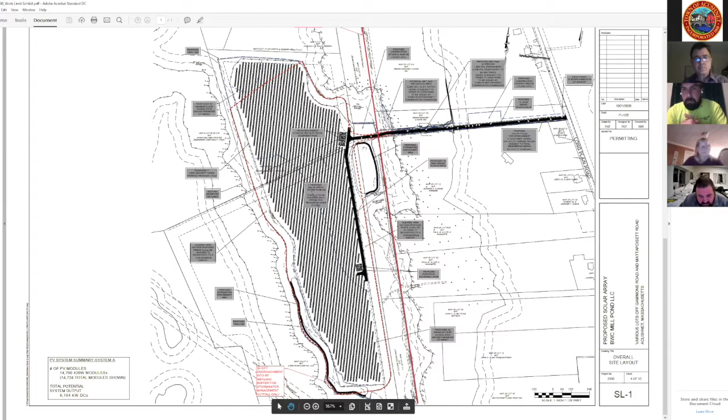This plan here is showing the red dashed line was the limits of work that were approved under the previous order of conditions for the project site last year. And then this bluish line that's following the tree line is the expansion of the limits of work that is required for the solar array. As you can see, for the most part, we're following the same line along the easterly and westerly side of the array, with the exception of the stormwater management facility here. And as I said, there's a small encroachment into the 50-foot wetland buffer here.

Access to the site is through an existing gravel road that comes in through the town of Mattapoisett. We will be filing a notice of intent with the town of Mattapoisett's Conservation Commission for improvements to this road, as it does go through an existing wetland system. It's an old farm road that was used to access this property. But all the work associated with the improvements to that road is in the town of Mattapoisett and would be covered under their notice of intent.

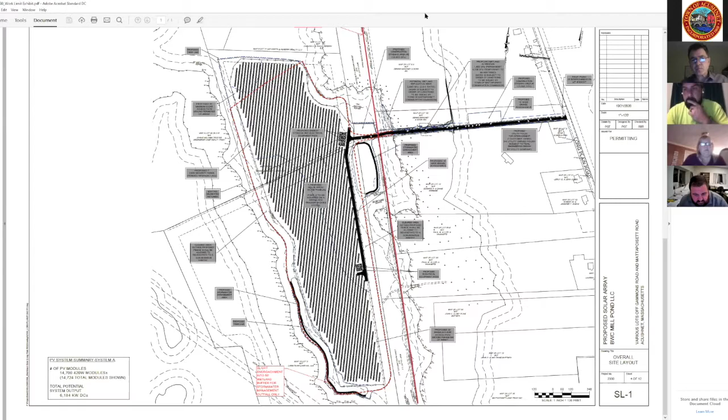Stormwater management is designed in accordance with the DEP standards. We've tried to follow all the DEP guidance documents with regards to siting the solar facilities in the buffer zone areas to the project. That basically summarizes the project. I'd be happy to take any questions. I am aware we don't have a DEP file number yet, but hopefully we can discuss the commission's comments and questions. Okay. Thank you, Mr. Riccio. Agent Kelly, questions, comments from you? How does the stormwater work? Can you explain it a little bit?

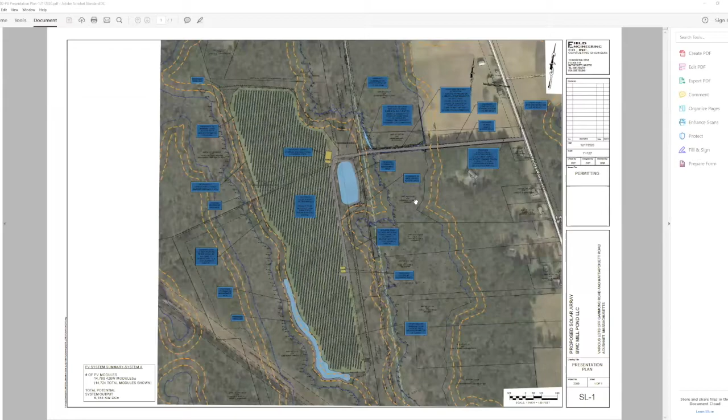Okay. Yes, I'm going to go back to the color plan here. Basically, what we have is the solar array itself. We're not changing any of the grades on the subject parcel. So there's a ridge line that runs through the center of the project. The topo splits, the runoff goes either to the east or to the west to the surrounding wetlands. The detention areas that have been designed are to reduce the rates of runoff to these wetlands, which comes from the clearing of the trees and the planting of what will end up being a meadow underneath the solar array.

The gravel road itself has a crushed stone edge drain infiltration trench that'll intercept the water that flows across the drive from the array. And that also has a piping component that will discharge into this detention area here. The detention basin has outlet control structures or outlet control culverts that will control the rates of runoff leaving the site.

During construction, we obviously have the perimeter stormwater controls, silt fence and straw wattles around the project. And given the size of the clearing areas, we're also proposing intermediate rows of straw wattles through the array itself to slow down any runoff during construction. It's pretty flat out there, if you recall when we were out there last year. So we don't anticipate a lot of high velocity runoff coming off of the array. But we did incorporate intermediate erosion controls within the array itself. Finally, upgradient of each stormwater basin, we do have another row of wattles and silt fence to protect those basins that would stay in place until the site stabilized with vegetation.

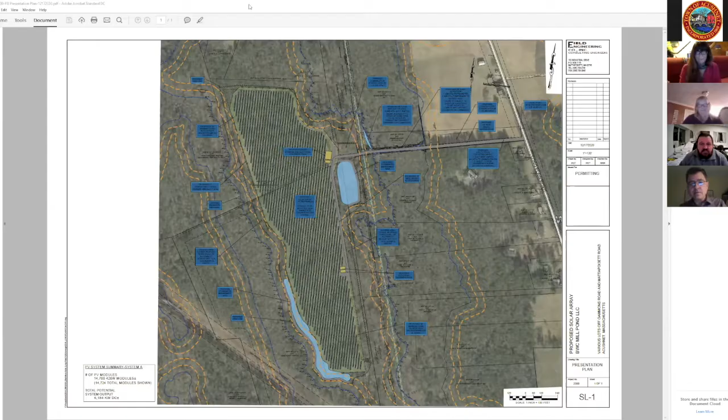So moved. Thank you, Everett. Do we have a second? I'll second that. Thank you, Ryan. Heidi, how do you vote? Heidi, is that a yes from you? Yeah, yes. Thank you. Everett, yes. Yes. And Ryan? Yes. So that's unanimous. Thank you all.

Appreciate that. Thank you, Mr. Riccio and Mr. Laracy. Thank you, Mr. Chair. Hope everyone has a happy holidays, Merry Christmas, and Happy New Year. You too. And we'll see you in January. See you in January. Super. Sounds good. Thank you very much.

Thanks. Okay, next item, we have a COC for GDC Development LLC for 1428 Main Street. A certificate of compliance was filed by GDC Development LLC for property located at 1428 Main Street, map 5, lot 6A. The applicant proposed to construct a single-family dwelling with associated grading and septic system. Somebody here to speak on behalf of this project?

Early, what do we know about this project? We were there on Saturday. It looks finished. Looks like it's been finished for a long time, actually. It looks good. Okay. Anybody else that was there like to comment? Yeah, it looks done to me. I see no reason not to award this COC. Okay, that's always good news. So, if you're not going to speak on this issue, I'll have you mute yourselves, please. Otherwise, if you do have a question or a comment for this project, please identify yourself and we'll accept your question or comment.

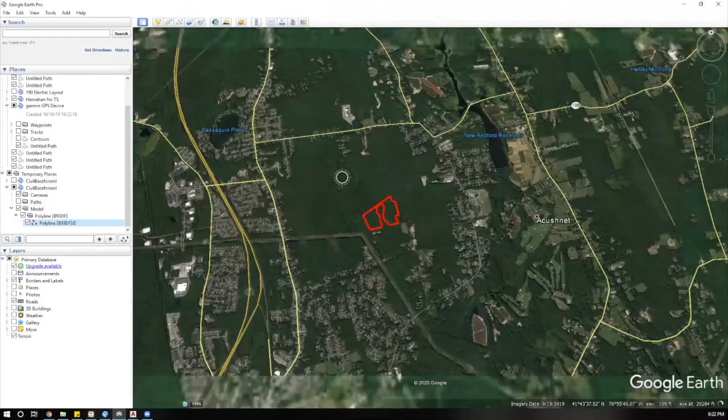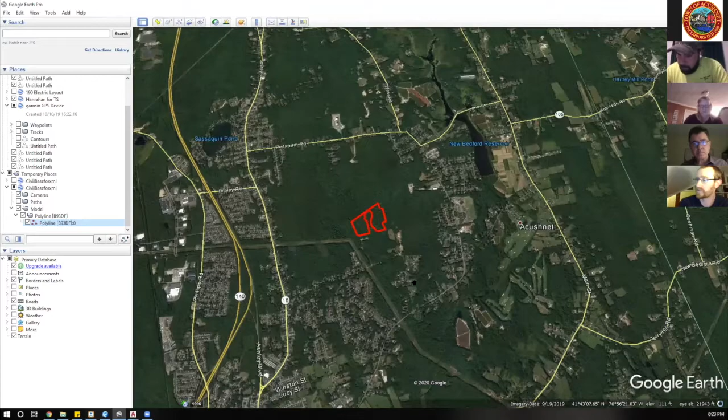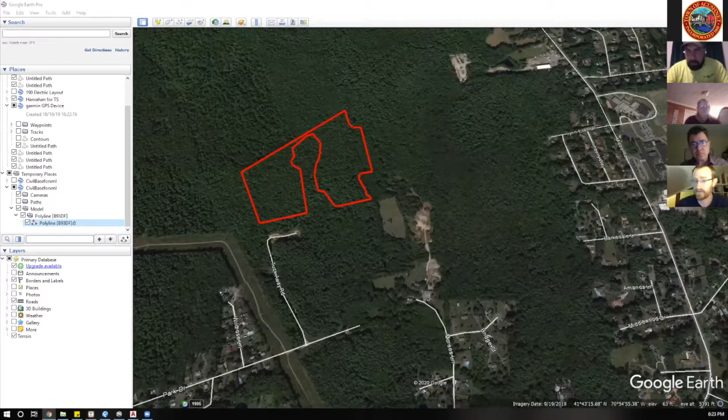All right, so this project is located on parcel 24, 24B and 24C, north of Morse's Lane. So you can see here on Google Earth, the project is located in this wooded area east of Route 140. Morse's Lane runs here. And this red line that you'll see is the project fence location. Let me just switch over to a view showing the project.

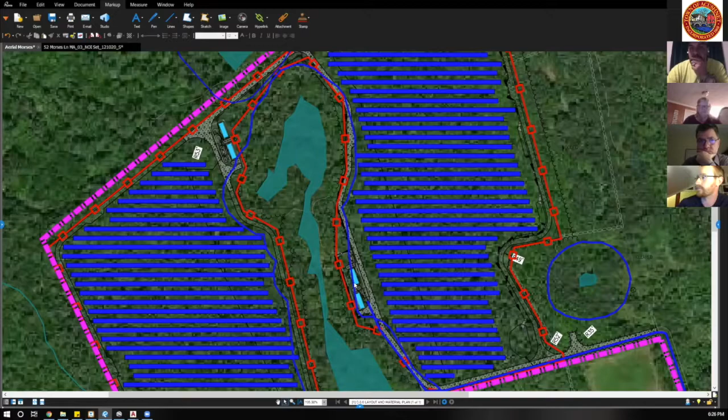The layout for this project, you may remember there's another Borrego project, the Mendel Road project that we have had. We used a very similar layout structure where we did not encroach anywhere on the site within the 50-foot buffer of any resource, wetland or vernal pool. So all work would be outside of that kind of 50 to 100-foot buffer.

It's split between shade management areas, which would just be tree cutting, leaving the stump, minimizing earth disturbance there. And then inside the fence, which would require the removal of stumps. Let's see here, you'll see this.

So as far as tree clearing goes, just to make it clear, because it's a little bit hard on this plan, this central wetland area will remain wooded. We're not clearing within the 50-foot buffer of this wetland system, which is why we have this split east and west array, but still combined would be the 5 megawatts that this project is.

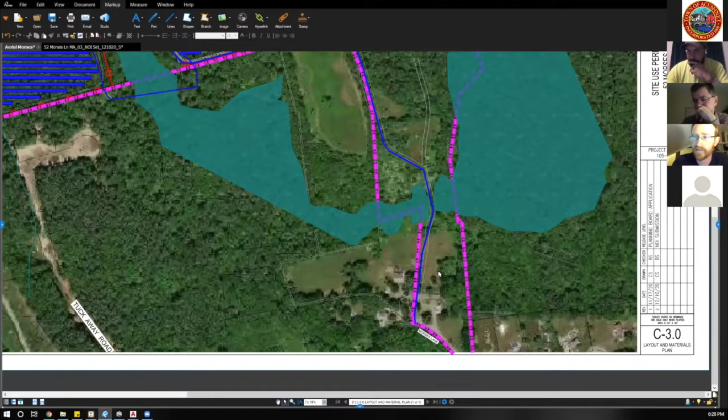Just to touch on stormwater, we have submitted a stormwater report and looked at the site, and because of the change in cover type from wooded to a meadow type cover underneath the solar panels, we will be installing roadside swales along the access road and the perimeter road to catch runoff coming off the array and transport it to the south of the site.

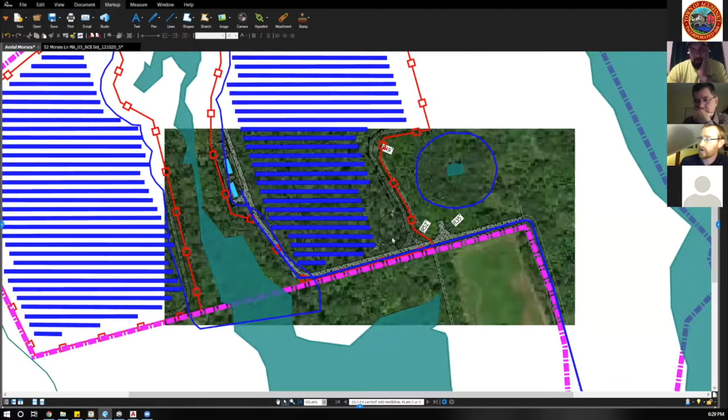The general topography runs to the south, where we'll have a basin in the southeast corner of the site, with an outlet control structure to ensure that any discharge from the site mimics the pre-existing discharge the site's seeing, as it's currently wooded. Other than that, happy to open up to any questions that the commission may have.

I'm going to anticipate a question that Mary Lee is going to ask. Have you provided the stormwater calculation to the commission for this? Yes. Okay, I haven't had a chance to look at anything yet. Thank you. Okay, Mary Lee, over to you.

What does the red line signify? That's the system fence. Oh, okay. So what are the 7-foot high nodes? With 6 inches under. Correct. And the nodes there are posts on the fence? Well, those are diagrammatic, so this is not exactly where they will be. But the posts are generally driven posts every 10 feet on the straight sections, with a concrete footing on the posts at the corners or gates.

I see. And what's going on the ground underneath the array? Underneath the array, we will reseed this. We are proposing a pollinator-friendly mix, an Ernst pollinator mix, kind of a low-grow wildflower mix for any disturbed areas. Wow. Okay.

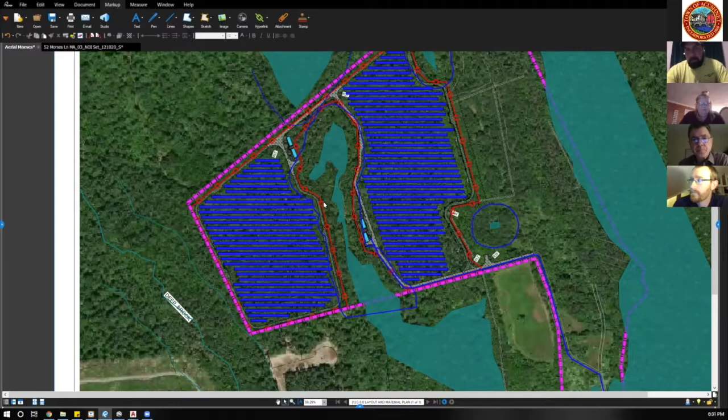And it's going to remain wooded around the vernal pools, right? Yes, the southeastern vernal pool, we're not encroaching anywhere within the buffer whatsoever. This northern one, you can see this blue line is the 100-foot buffer. Again, we're not encroaching within the 50-foot buffer of that, but there is some proposed work within the 100-foot.

And just to clarify, all that pink on the diagram, is that all erosion control? I'm sorry, I should have gone over what everything is here. The pink is actually the property line. Okay. As far as erosion controls go, we are going to be utilizing a combination of silt fence and stump grindings, which we've had a lot of success with on other solar sites. It's going to be a lot of material to use and really make sure there's no sediment being tracked off site. So those perimeter controls will be in place. All right, so that's a new one.

How are stump grindings installed? How are they used? So they're ground on site. There'll be a grinder on site, and then they basically place them in long rows, typically 2 to 3 feet high, kind of a couple feet wide. So it'll be almost like a small berm that allows water to pass through it. It's kind of like stump grinding, so very similar to wood chips in a way. So it allows that water to pass through, but traps a lot of the sediment.

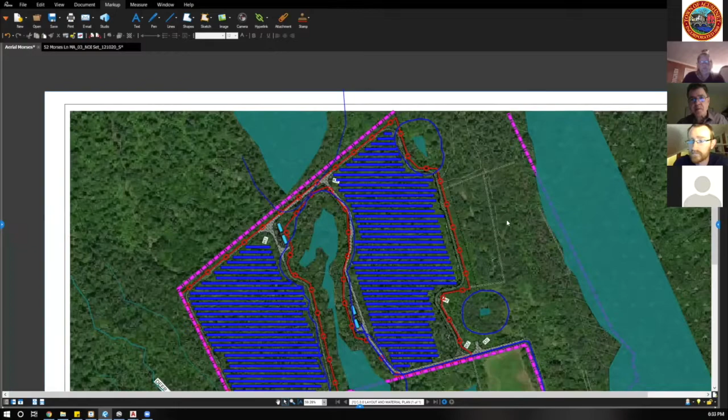Okay, anybody from the commission with questions for Mr. Smith or the other person here for this project? I have just a quick question. Any chance of getting those vernal pools certified? Yeah. That's something that we could do as a commission. Of course, I noticed that the Siennas have tuned on to this. I think the Siennas would need to let us onto the property to do that. And if you'd like me to explain the process, I can certainly do that now. Sure. I'm asking the Siennas if they're willing to hear that. John or Christopher, I don't know which one of you is on, or both of you.

So to certify a vernal pool, if Mr. Smith's organization is telling us that this is a vernal pool, then they either have seen evidence of obligate breeding species, which means spotted salamander, marbled salamander, or wood frogs, or both. And we would need to get there just to take some photos during March, April, May to show presence of eggs. And if we really time it well, we can actually see some of the adult animals going in to breed to lay the eggs, and then see some other evidence of those animals nearby.

And I think that would be a good thing for this project. And certainly it's a good thing for documentation of natural resources in the town. So hopefully property owners will be amenable to that. Doesn't cost any money. And I actually find that process to be a lot of fun. It's a good excuse to go for a walk in the woods. Yeah, we could definitely discuss that with the landowners. Okay. I assume that can be a condition of the project if needed.

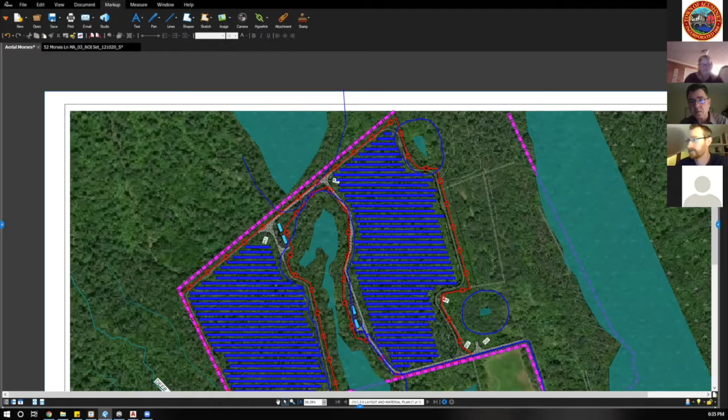Mr. Smith, to make it easier for me to see if somebody would like to ask, I'm gonna have you stop screen sharing, just so I can see gallery view again, because there may be folks who want to ask questions. Yeah, if I can figure out, here we go. All right. Super. So is there anybody that's tuned in that would like to ask a question or get some clarification on this project? If so, unmute, identify yourself, and ask your question. There is one thing I'd like to add. Go ahead, Marilyn. This project is 400 feet from the next project in the same area. Literally, there's 400 feet between the one on Park Drive and this one. Just so that you have an overview. Okay, interesting. I knew it was close. So any questions or comments from the audience then?

Nobody. Okay, in that case, I'll entertain a motion to table this vote until we have a file number from DEP. I think I said Department of Environmental Management; what I should have said is Department of Environmental Protection. Clarify that for the record. Somebody want to make that motion to continue? So moved. Thank you, Everett. Do we have a second? Thank you, Heidi. Ryan, how do you vote? Yes. Heidi? That's a yes. And Everett? Yes. That's unanimous. Thank you, Mr. Smith. And I believe Mr. Bailey was tuned in for this as well, so thank you both.

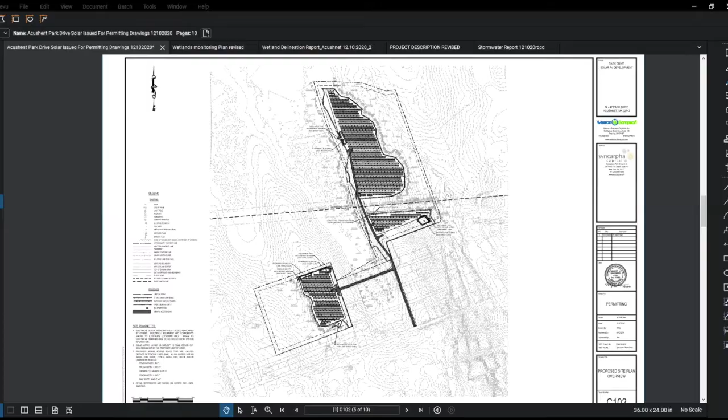So the proposal is for a 7.5 megawatt solar PV array with battery storage off of Park Drive. This is the site here. Park Drive is located down at the bottom. The site is predominantly wooded. There is a cleared area that comes off of Park Drive. It's a relatively flat site. It is surrounded by wetlands. It's probably a little hard to see on the screen, but these grayscaled flags represent the wetland areas.

So we've got 3 separate arrays. There's a northern array here, there's a middle array here, and there's a western array here. Each individual array will be surrounded by its own fence. Access, as I mentioned, will be off of Park Drive. The existing access that's there now will be improved into a gravel road. So the gravel road will be built up so that each array can be accessed during and after construction.

There is an existing overhead utility easement that basically bisects the site. It comes right in through here. The interconnection, which is the location where the PV array actually feeds in the utility, will be within that easement. So there are no new poles proposed down by Park Drive.

The wetlands, as I mentioned, sort of surround the site. They're located here to the east, to the west. There is a perennial stream further to the east, and we are well outside of the 200-foot riverfront area there. For the most part, the array is within some of the buffer zones. To the west side of this northern array, we tried to keep 100 feet away. There are some areas to the east and in some other areas where we are definitely within the buffer zone.

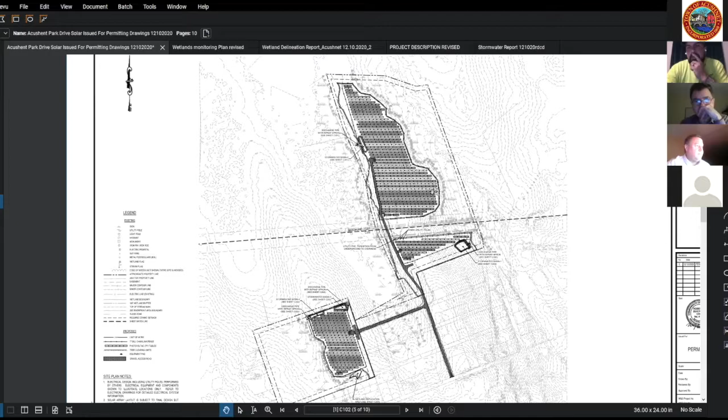The battery storage I mentioned is located right here, sort of in the center, just north of this overhead utility easement that runs east-west through the site. So that's a general overview of the project. Be happy to answer any questions that anybody might have.

Agent Kelly, you first. Where is Deep Brook from here? So Deep Brook is, I believe this is it here, and Devin, please chime in if I misspeak, but see these flags here that say TOB, A2, A3, A4, A5, that's the top of the bank. And when Devin was out there flagging it, she flagged the portion of the brook that was closest to the site. So the proposed limit of disturbance is well outside that 200-foot riverfront area. Cool. Okay.

And what's going on the ground? Below it, it's a low growth seed mix. Similar to the other ones, post construction, it will be a meadow condition. So we're going from a mostly wooded area to what will be predominantly a meadow type situation. Mowing is limited, typically a couple times a year, so it gives the grass a chance to establish and maintain pretty healthy density. Post construction, the visits, aside from mowing, are usually limited to routine maintenance, or troubleshooting on the array components themselves.

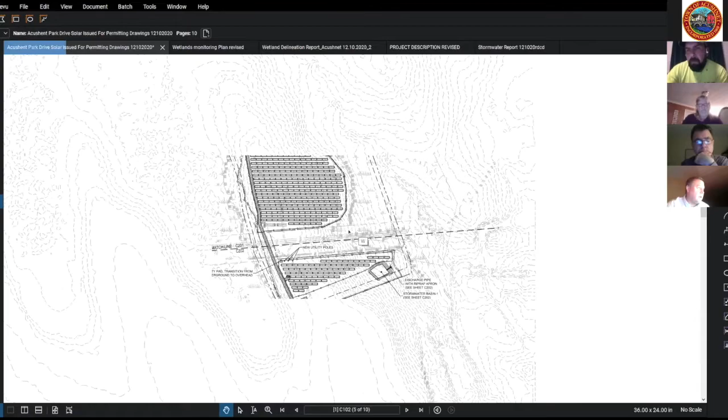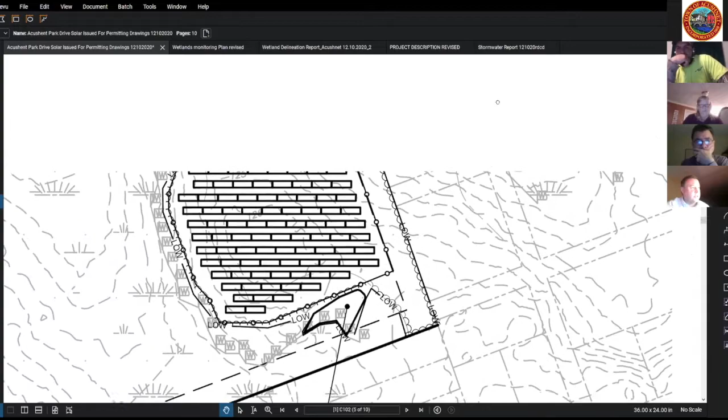In a little bit more detail. This is the area here. So this is the closest that we get to, aside from the actual disturbance here, but in the south, this is the replication area that's proposed. So obviously the topography is going to have to change a little bit to be able to bring this wetland finger up and through this polygon to provide an area, like I mentioned earlier, that's a little bit bigger than a one-to-one replication.

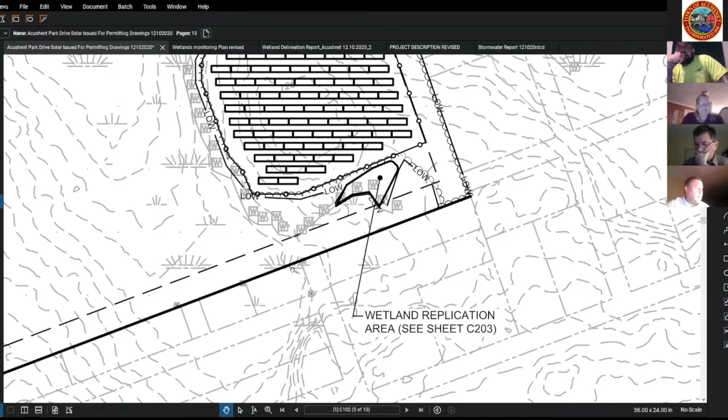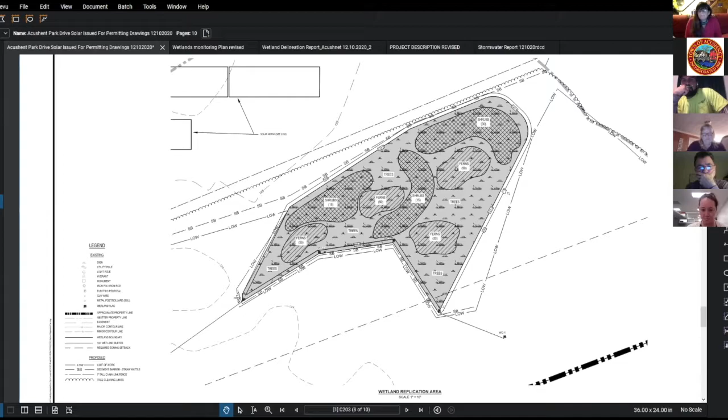Okay, and what I saw was 30 trees, 30 shrubs, and 200 ferns. Is that right? Yeah, let me get to that planting plan. Just going to scroll through this. There it is. Yeah, so this is just a zoomed in plan of the proposed replication area along with the proposed plantings and the quantities that are in here.

Great. And there was a mention of using wetland soils. I was wondering where they come from. You just gonna dig them up? Devin, do you have any thoughts on that one? Oh, am I unmuted? No, we can hear you.

Oh, great, excellent. The wetland soils discussed in the plan are any wetland soils that are maybe dug up as a part of that road construction. They're stockpiled to the side because that's good soil and we'd like to reutilize that. So that gets utilized in the replication area. I see. Okay. That makes sense. So will you be able to water this stuff?

Oh, I'm sorry, excuse me one second. My lights went out at the office.

Oh, goodness. Watering will not be necessary. They're species that have been designed to survive in the environment that they are proposed in. The grades will be lowered so that they should be at the appropriate hydrological regime for them to survive just fine without watering. Okay. Well, we watch them for 2 years. You know that, right? Absolutely. Yep, there's a monitoring plan attached to the submission. It details the 2 years of monitoring that would be required, and there's several monitoring data plots that would be installed and monitored throughout those years to ensure vegetation success. Great.

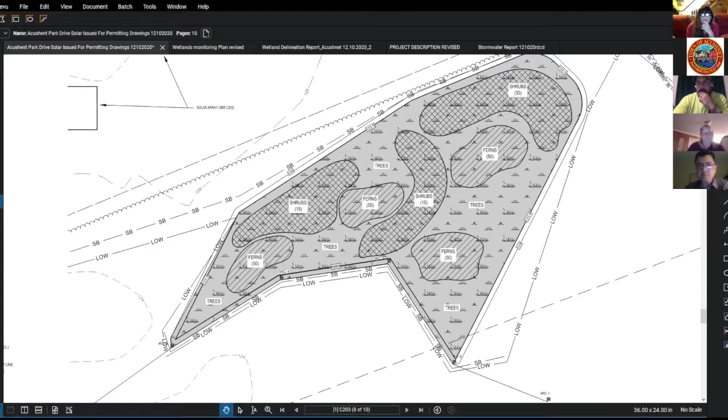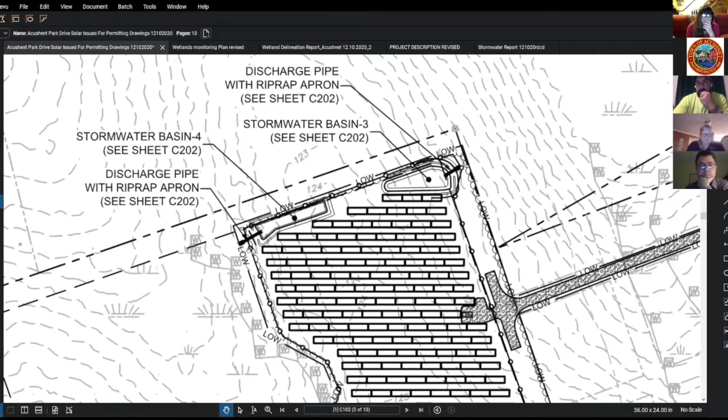That's correct. Since there's 3 separate areas of the array, there'll be 3 individual fences, and the 7-foot high requirement comes from the National Electric Code. That gap of 6 inches can definitely be accommodated to allow turtles or whatever else needs to pass through. This dark line with the circles represents the fence. So there'll be 3 different perimeter fences and 3 different access gates: one surrounding this, one surrounding this one, and then one surrounding the northern one.

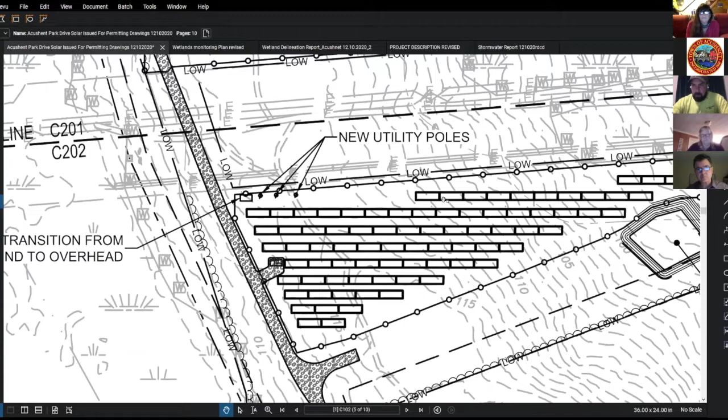Since you're zooming in on the highlighted stormwater basins, can you talk a little bit more about drainage and collection and discharge of stormwater? Sure. Because of the change in surface cover, we're going from a wooded area to a post-construction meadow condition, and in addition there is some impervious area that's added. They're mostly unconnected impervious because they're driven steel posts. Each of these rectangles represents a single rack or table that holds individual modules, and each one has 4 driven posts, so that adds some level of impervious area.

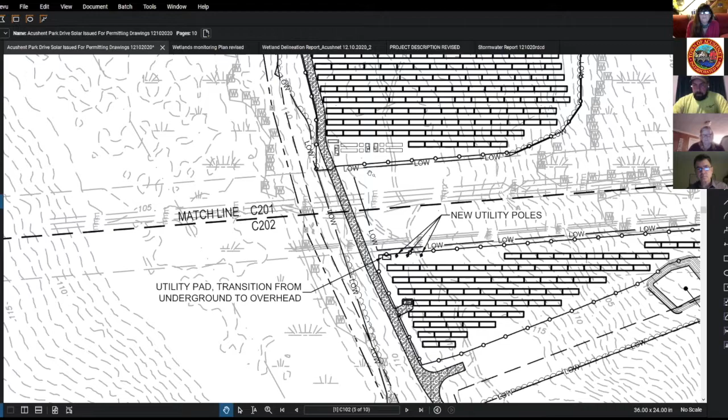In addition to that, there are the equipment pads that I mentioned before that have the batteries or the transformers on them. So there is some additional impervious area. In order to meet the stormwater standards, we've put in these basins, which are designed to contain the water quality volume as well as provide attenuation for peak runoff rates, so that for all the storm events up to the 100-year event, there's no increase in stormwater flow rate from the BMP locations.

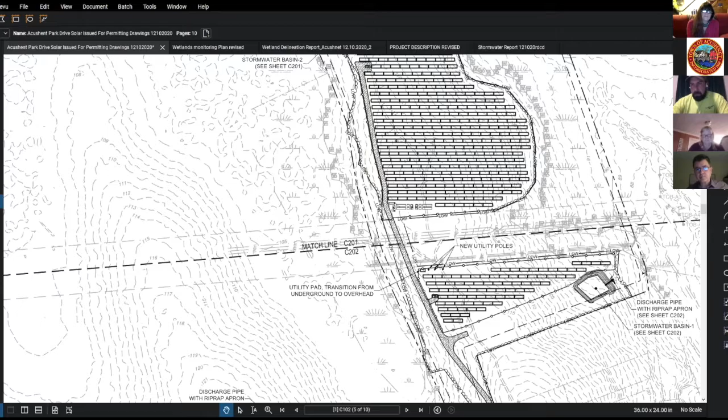This one here will ultimately flow to the east towards this wetland area. The basin up here will flow to the west towards this wetland area. Skipping down to this other one, there are 2 basins here that the water will carry into, and then this one will discharge to the east toward that wetland, and this one to the west toward that wetland.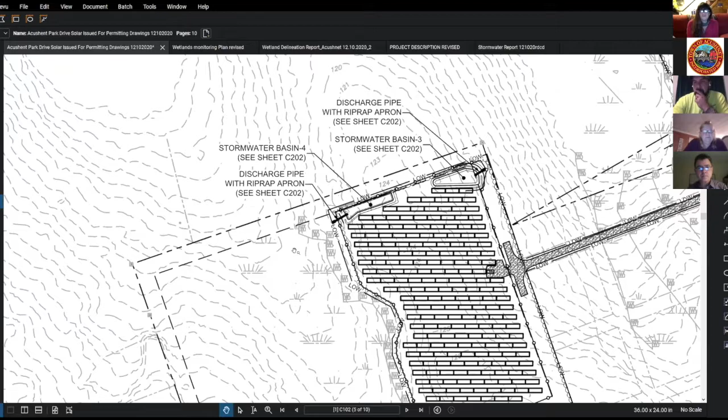Thank you. And the access roads, are you using paper streets for those? So this one, yeah, not entirely. My understanding is there were some old plans that were submitted, and that this land was considered for subdivision many years ago. So there is an old paper road that ran up here and another one that ran up here. What we've made sure we do is that all of the land that we're proposing for the access roads, as well as the arrays, are owned by the Whites. So it's all owned by the same family. Okay, that makes sense.

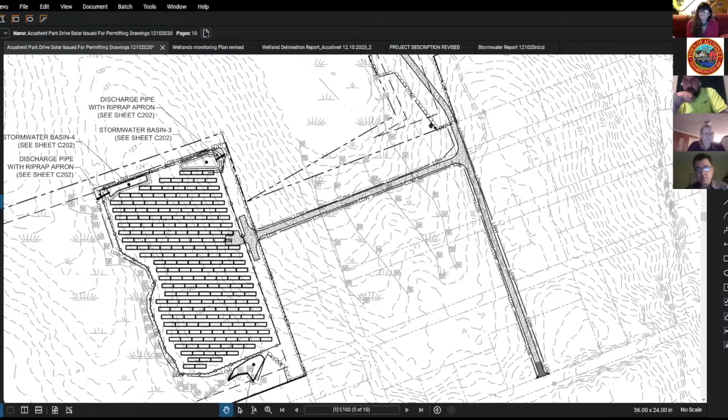Anybody on the commission with questions for anybody from this team? Yeah, my only concern was the perennial stream up to the north of the project. You said TOB-A2 was where Deep Brook was, and you said it was within 200 feet, and all work was within the 200 feet. But that stream goes up further to the northwest through the whole set of woods, correct? Yeah, let me see if I can pull up a screenshot here. Hold on, I can show you.

And this is from a CAD file, but essentially what Devin flagged was the area of the stream that was closest to the array, to show that we're more than 200 feet beyond it. But I can pull a screenshot here that will show where that TOB-A2 flag was. You are correct. The stream does run along there. That's correct. It's just more than 200 feet away.

So can you see this little screenshot? Do you see like a thick red line? No, we can't, Rob. Okay. Hang on 1 second. Let me just stop sharing for a minute and try to reshare that one. Can you see this now?

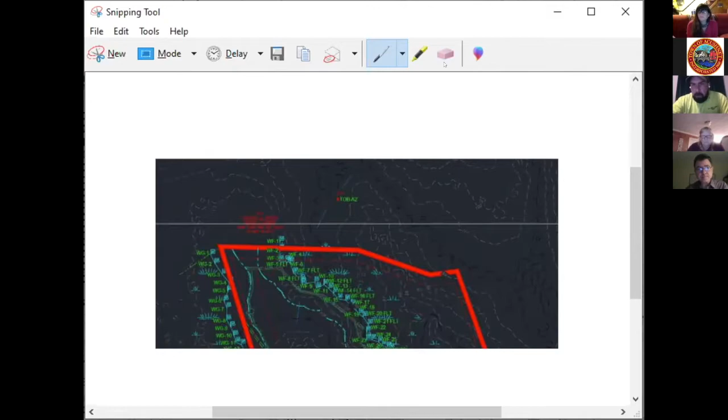Yep. Okay, so this is a screenshot from the AutoCAD file. I can't really zoom in on it because I took this from a snipping tool. But this location up here where I'm moving my cursor, that's TOB-A2. So this basically goes from here straight down to those other flags that I was showing on the other plan. So you're correct. It does end up going further to the north, but this is the other flag.

The only reason we didn't show it is because the location that we took is beyond the northern extent of where our plans are. But we're definitely well outside of that 200-foot riverfront area. Yeah. All right. There's several names on here that are new to commission meetings. I want to open it up to folks if they have questions for our project proponents. Anybody here with questions? Hearing none. Go back to my commission members. Any final questions or comments from you on this? I think I'm good, Bob. Okay.

And we go back to my agenda here. So you're looking for an NOI on this, notice of intent. So I guess we can entertain a motion for a positive order of conditions on this. I don't feel any need for any special conditions. Merrily, do you? No, I'm concerned about the replication area, but it seems to be covered. So no, I don't think so. Okay. This would be a pretty complete plan. So I'll entertain a motion for a positive order of conditions for this project as presented.

So moved. Do we have a second? Thank you, Heidi. Any further discussion? Okay, Ryan, how do you vote? Yes. Heidi? That's a yes. Everett? Yes. And that's a yes for me. That's unanimous. So thank you all. Thank you. Thank you very much.